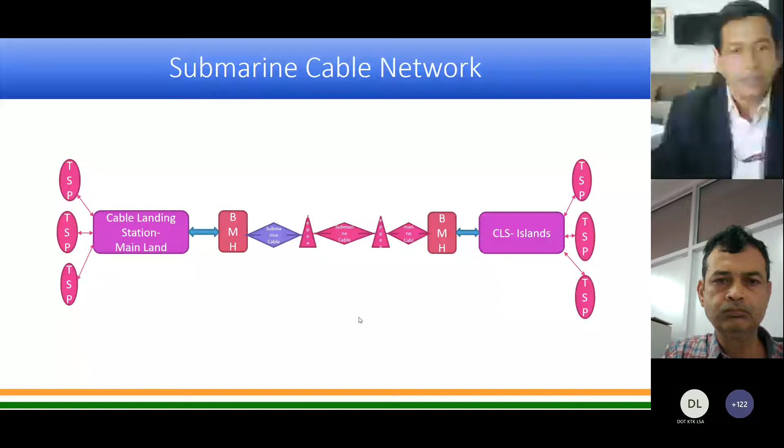As sir has told, the submarine cable is important, and satellite communication cannot be a substitute for the submarine cable. Even the LEO constellation, which they claim can provide 100 Mbps of connectivity to the terminals, cannot substitute the submarine cable. There are two major hubs in our country where most of the international submarine cables terminate. First is Mumbai and second is Chennai. Most of the international submarine cables land there. And our Chennai Andaman cable is also mentioned, second from Chennai. At present, 99% of the international traffic flows through this submarine cable network.

The total capacity available in our country at present of submarine cable is 103 TBPS. Out of that, only 67 TBPS has been used as on 31st December 2021, and more capacity is planned and under installation. Around 1000 TB of capacity is already under plan for installation.

Some of the important cables being laid include the India Asia Express and India Europe Express, being laid by Jio, and then MIST, being laid by NTT Docomo. There are also three other cables, 2Africa, Raman, and SMW6, which are coming up in future. So that was a background on submarine cable.

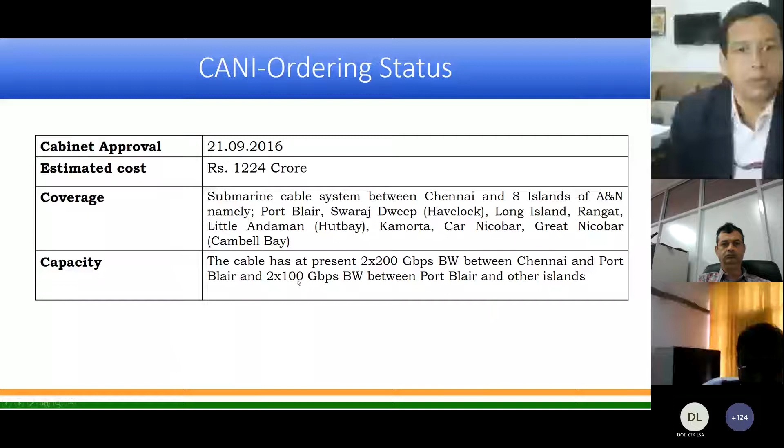As our member services sir has already mentioned, this project's foundation laying stone ceremony was inaugurated by the Honorable Prime Minister on 30th December 2018, and this project was commissioned in August 2020, well within the time basically.

Once the project got commissioned, it really helped the people of Andaman Nicobar during the lockdown period. Some children who had returned back to their parents continued their studies because of the availability of this cable, and e-medicine services and e-banking services really helped them cope during the COVID period.

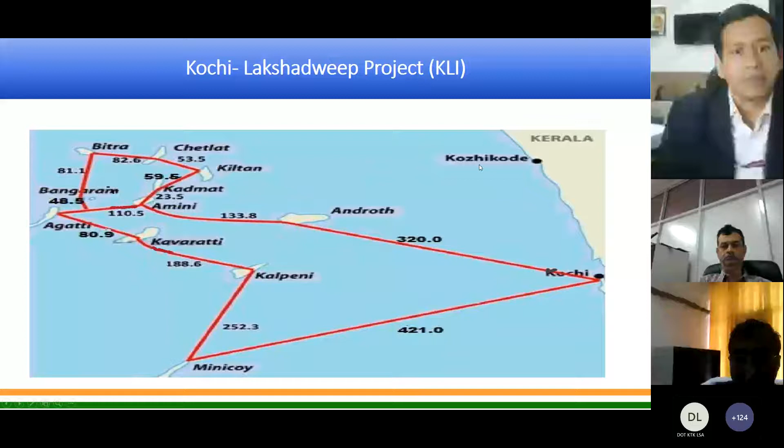The purchase order for this project was placed in September 2021, and the implementation period is of 2 years. But we are targeting that this project gets completed by May 2023. The Honorable Prime Minister from Red Fort has given the target of 1,000 days, so this is ending in May 2023.

After May, the rainy season starts, so we need to anyhow finish this project before that. Otherwise, again there will be no work period up to November. So we are targeting to get it completed by then.

Now, after discussing the CANI project and KLI project, I would like to come to the point of how things look in USOF when we take up a submarine cable project. There are three important parts of handling submarine cable projects in USOF. First is the approval stage, second is the implementation stage, and third is the O&M stage.

When any submarine cable project is taken up in USOF, the first step is to prepare the DPR, detailed project report, based on a desktop study. That DPR report is further discussed with all the stakeholders. Stakeholders include the CS wing, finance wing, BSNL, and then we discuss it with the UT administration, because they are the biggest stakeholder in this, and we have to get their consent.

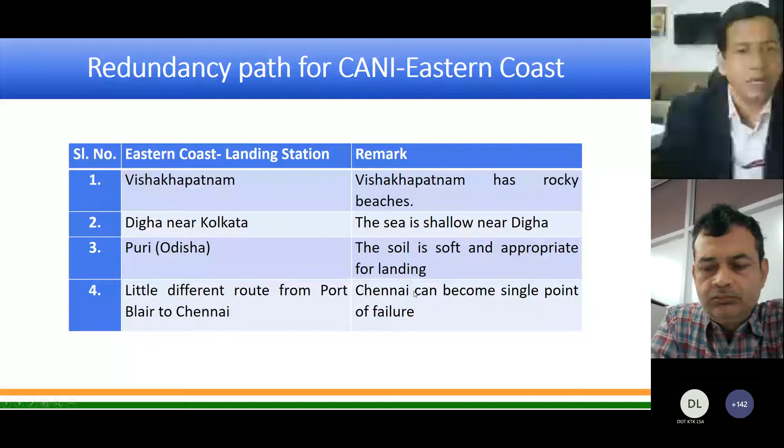So this is how the entire structure of the cable will look like after laying the redundancy cable. In this project we are not only laying the cable from Puri. At present, as I mentioned earlier, 8 islands have been connected, but while laying this redundancy cable we will be connecting 8 more islands of Andaman Nicobar, which have been requested by the UT administration. One more important thing we will be doing is putting all the islands into ring connectivity also.

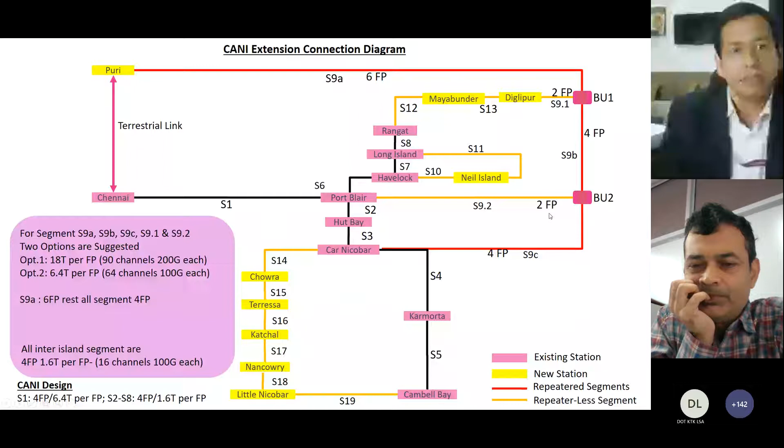So the new islands as well as the old islands will come into the ring, so that in case of any failure no services are hampered. This is how the cable will look: it will go from Puri, along the northern side of Andaman Nicobar, and then come downward.

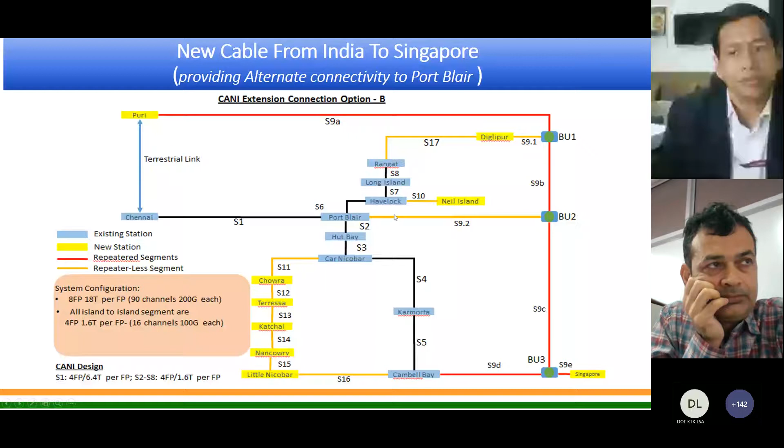There was one thought of extending connectivity from Port Blair to Singapore. A DPR was prepared for that project, but it could not be taken up. Earlier it was thought that by connecting Port Blair to Singapore, international bandwidth would be made available, and BharatNet services in India would become cheaper because internet bandwidth would come directly from Singapore to our country.

But the issue was further analyzed here in our DoT. We found that BSNL at present spends around 73 crore rupees on hiring international bandwidth, out of which only 2.34 crore rupees is spent on hiring bandwidth from Singapore. The rest is hired from multiple places on the western side, and at present most of the bandwidth comes through an MPLS kind of structure. So this project was discussed but has not happened as of now.

Plus, setting up of any international cable requires formation of a consortium and basically identification of demand. Plus, we need to set up offices there in Singapore, or we need to have a plan for who will buy our bandwidth. All those things are needed for establishing the submarine cable. So that's why this project could not be taken up.

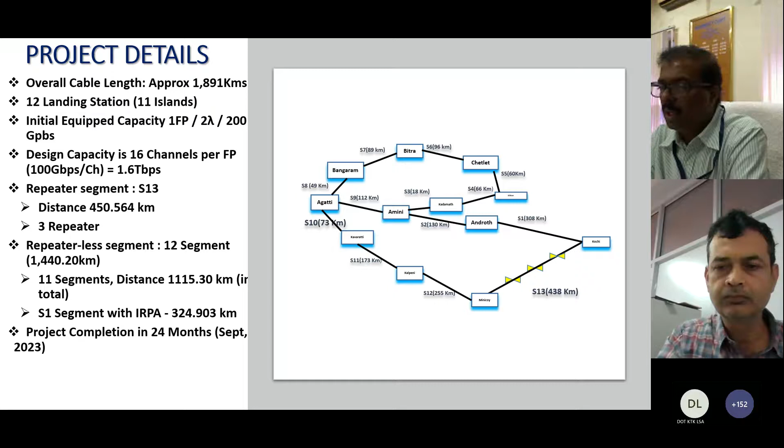And there is one repeatered segment, from Minicoy to Kochi, which is about 450 kilometers. There will be 3 repeaters under the sea, and all the other 12 segments are without any repeater. Whereas S1 has a span length of about 330 kilometers, which requires an amplifier. The amplifier is called an inline remote pumping amplifier; basically, it is a Raman amplifier. We will see the details of this amplifier later on, and the project completion is 24 months. Next slide, please.

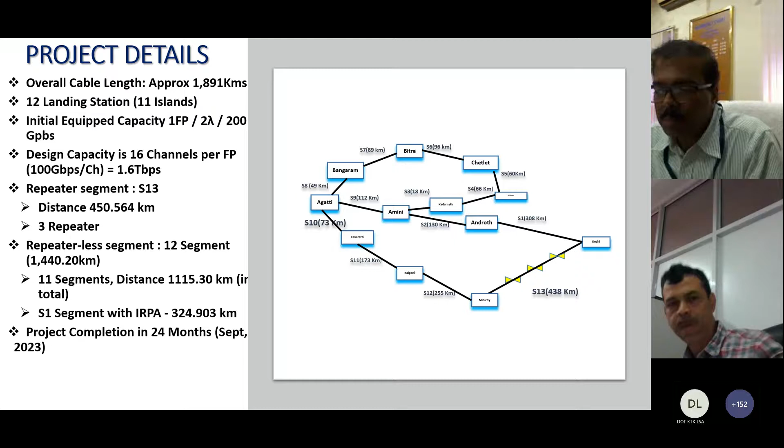So these are the segment lengths, total 1,891 kilometers. Next slide, please. Sir, next slide. Yeah. So coming to the wet plant part, next.

So most of these are covered, but how the route is selected: there are certain criteria, various factors which are taken into account while deciding the route and the length. Normally, the seabed profile will be studied thoroughly. We would like to lay the cable in deeper sea than shallow water, because in shallow water the cable is prone to damage. So we will select the deeper sea for laying the cable, and also in the deeper sea we don't require much protection like double armored, etc. So that is the preferred route, and accordingly the route is decided.

Then, especially, Lakshadweep is ecologically very fragile. As you know, Lakshadweep Island is a coral island, so the coral should be protected. That also is taken into account while deciding the route. Then proper crossing over: we have to take the existing cables and other pipelines into consideration while deciding the route. Then we should avoid certain zones earmarked by defense and environmental protection teams. So that also has been taken into consideration.

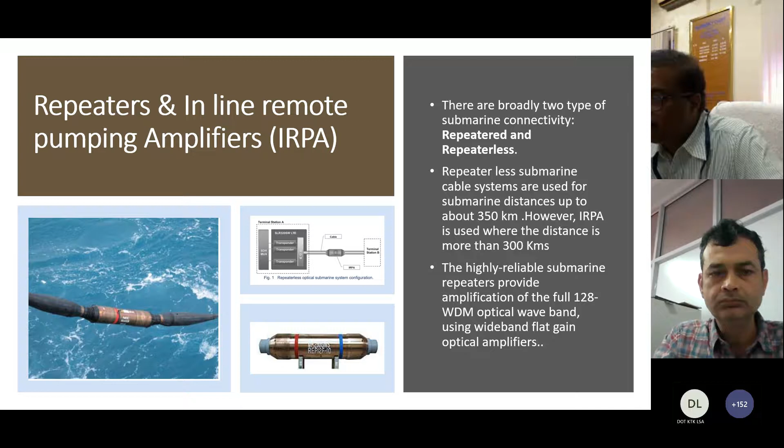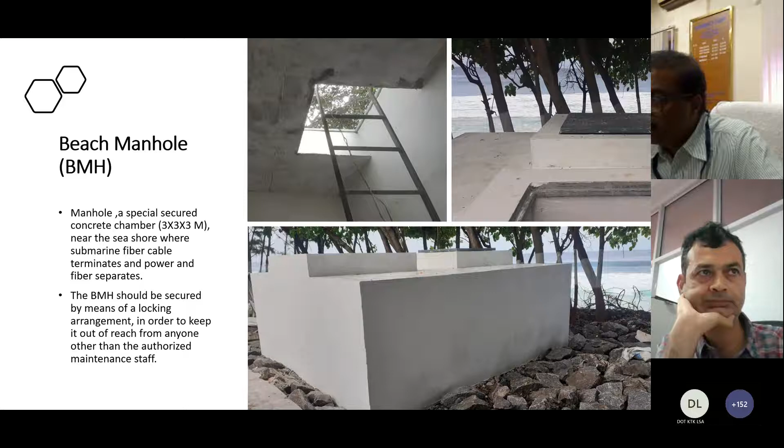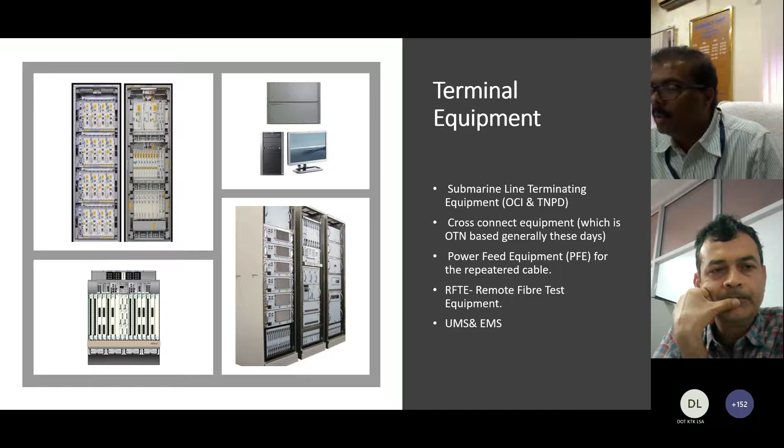In the CLS, these are the terminal equipments available. At the left side top is the OCI, the open cable interface, and then the transponder. Below it is the cross connect; basically, the cross connect works on the principle of OTN. Then we are using the power feeding equipment, required only for the repeater section, shown in the right bottom, and then the remote fiber test equipment, which is basically for monitoring the cable, fiber, repeaters, etc. Next slide. Next slide.

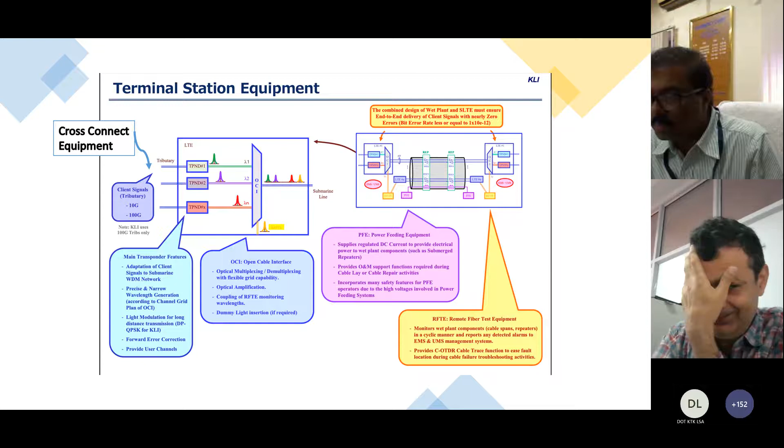This is a brief about the equipment in the cross connect. We can take all the available services, whether SDH based or Ethernet based, whatever it is, it can be accommodated. Then in the cross connect, based on the OTN protocol, the path selection will happen. Then it will go to the transponder. The transponder will convert the white signal to the colored signal, the required lambda for the submarine WDM, make it very narrow, and forward error correction happens there. It also provides some user channels, etc.

Then it will be fed to the OCI, where the muxing and demuxing happens. It also provides the lambda for the remote fiber monitoring system, and it does the dummy lighting, where the lambdas are free, dummy lights will be sent so that it will not disturb things once the other lambdas are loaded.

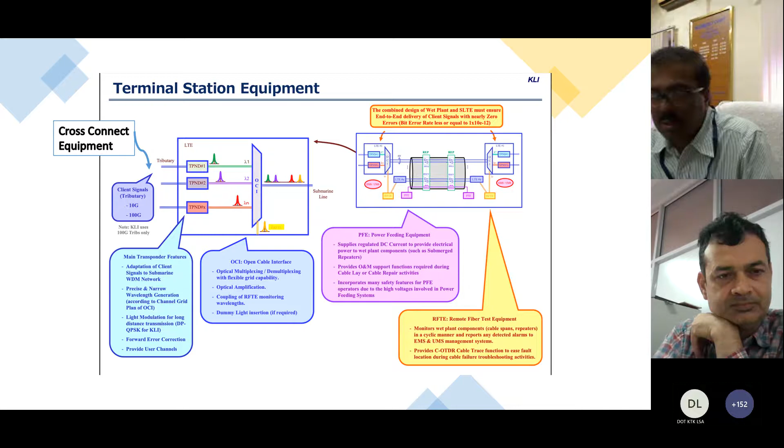Next slide, please. Apart from this, we have the UMS and the EMS. UMS and EMS, I think, are familiar to all of you, so we are not going into the details. Next slide.

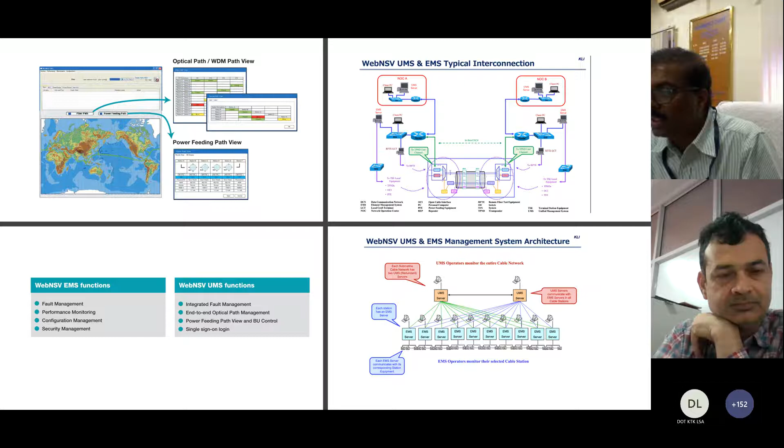Only thing is the remaining 3 processes are the most crucial part of this project, which require the infra readiness from BSNL side, which we are trying to make ready by the time NEC is ready for the cable laying and equipment installation. So the project is in a very crucial phase now. As it was told, our endeavor is also to complete it before this next monsoon. So probably by May, the project should be completed. Next slide, please.

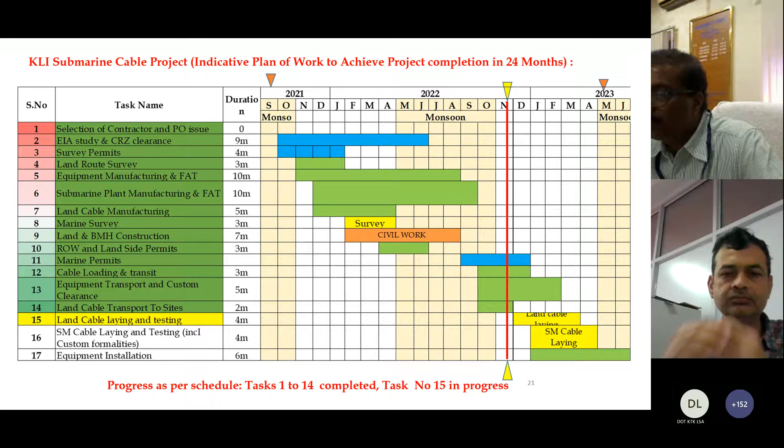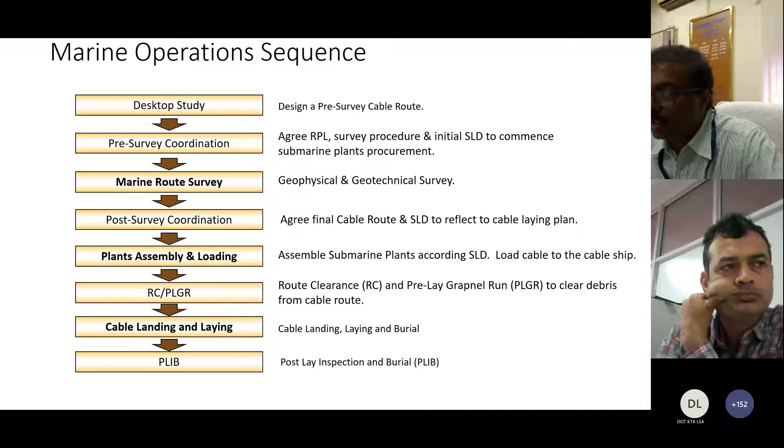So this is the next. This is the marine operation sequence. Already it was briefed in Sanjay Vashni sir's presentation, so I'm not going into the details. Next slide. So this is regarding the marine survey. Next slide. Next. So in the marine survey, basically based on the desktop study, we will prepare an approximate route of the network, and on that approximate route we will be conducting the detailed survey. Next slide.

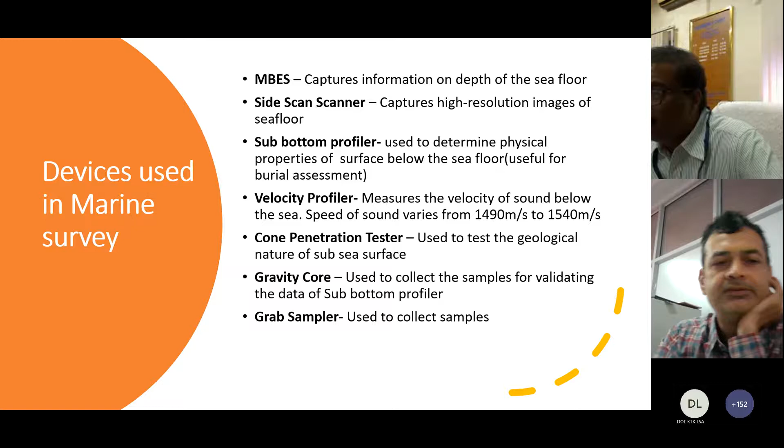These are the major tools used for the marine survey. The first one is the multi-beam echo sounder, which captures the depth of the sea floor. The second one is the side scan scanner, which will give high resolution images of the sea floor. And the sub-bottom profiler will give the seabed profile, what sort of strata is available below the sea floor. And then the velocity profiler gives the velocity of sound inside water, which is an important parameter for other equipment to process the data.

Next is the cone penetration tester. Basically, it will test the physical nature of the soil under the seabed. And in gravity core, an equipment will be dropped from top, and it will collect a sample of the soil, which is taken for further testing, and this will be used for deciding the burial activity. And the grab sampler is also for collecting samples from the seabed. Next slide.

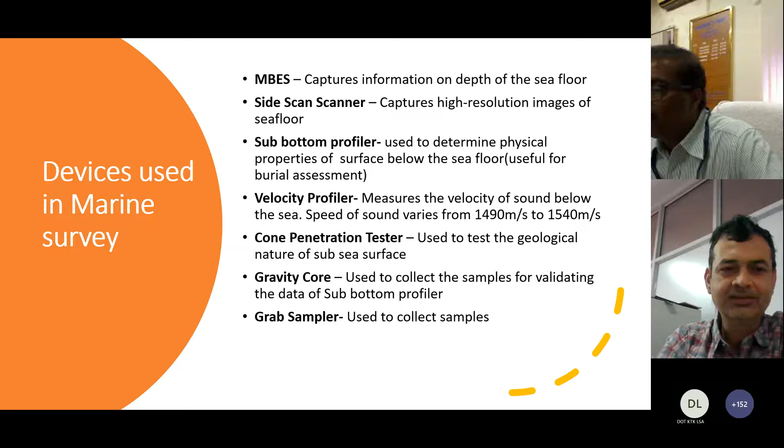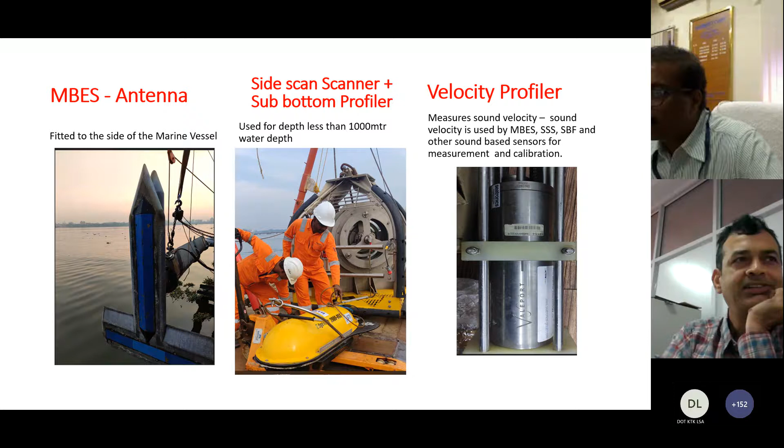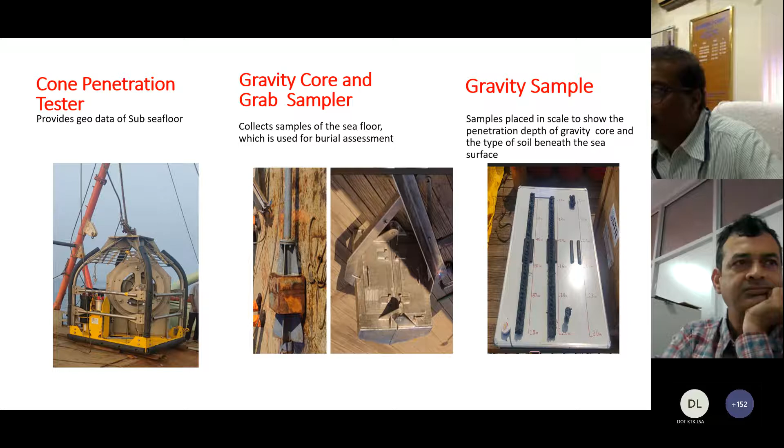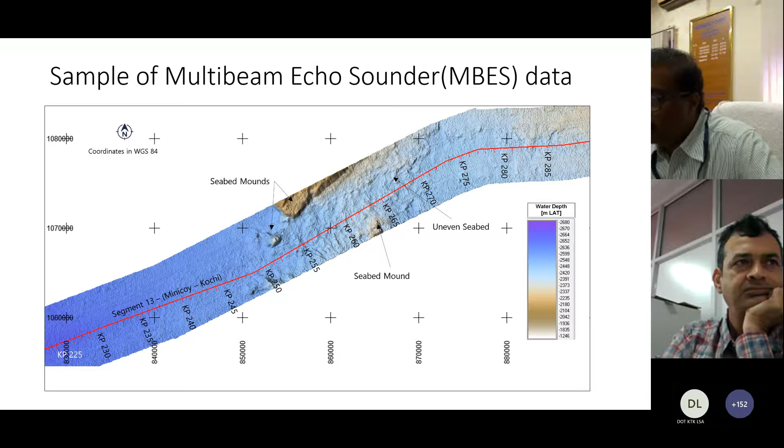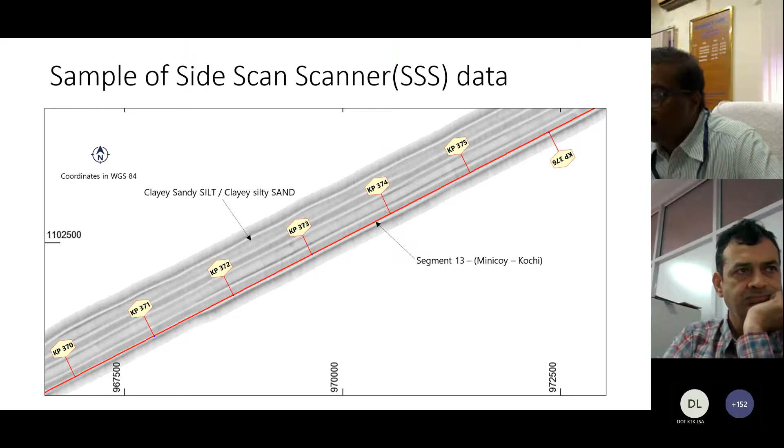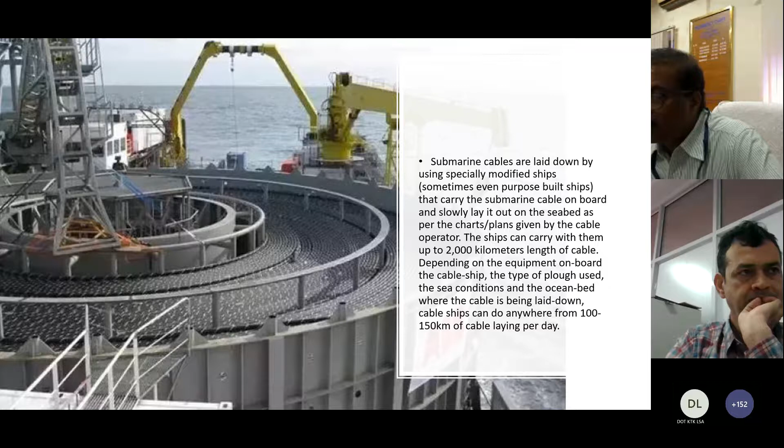So this is the ship which is going to be used for this KLI project. It is called MV Maram. And you can see another small boat nearby. That also is being used for this laying process. Next slide.

Next, please. I think these photos are not coming. Sir, can we have the previous slide? Okay, sorry, the PPTs are not coming properly.

Basically, the main vessel will not be going up to the seashore. The main vessel will be at a particular distance from the seashore. From there, the cable will be drawn by a small boat. The cable will be tied with buoys, and the cable will be floating over the water, and then it will be dragged to the beach manhole, and from the shore to the beach manhole, trenching will be done, and the cable will be laid up to the beach manhole.

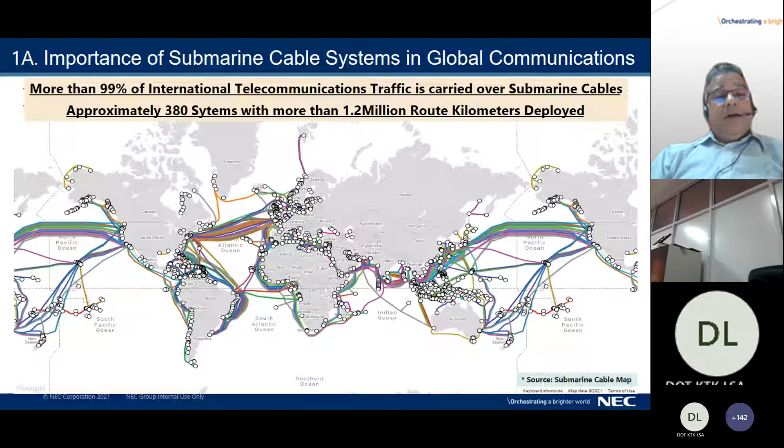If we look at the overall market, this information is around the pandemic time, and you can see there is huge growth in demand in traffic, around 140% in the Asian region, which is the region where we belong. This region generates the highest traffic currently, obviously because of the number of people living in this region, the highest population countries belonging to this region, China and India. So it's quite natural that the traffic growth or bandwidth demand is highest in this region.

Annually, around $13 billion are getting invested into submarine cable projects, with close to 13.5% annual growth that this industry is experiencing. And on account of the pandemic, work from home, and increased demand on online connectivity, it has helped the growth of this market.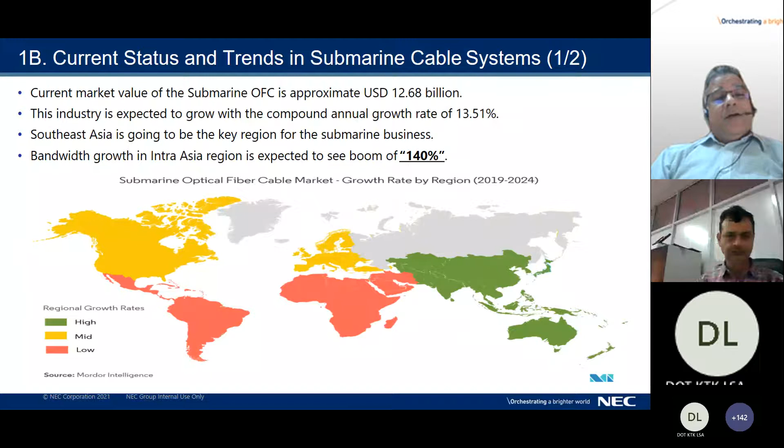Apart from the telecom operators themselves, the major submarine cable owners are the OTT players or content providers. So there are huge investments coming into submarine cables from these players, namely Facebook, Google, Microsoft, and recently even Amazon is investing into construction of submarine cables. So majority of the submarine cables that are getting deployed currently are co-owned by one of these players.

The second part that drives the submarine cable industry is the data centers. These players, along with the standalone data center operators, are setting up data centers globally that are the hub for communicating traffic from one place to another, and also for holding information and disseminating data. So content providers and data centers are the two key pillars of growth for the submarine industry.

Besides the telecom operators, traditional service providers are also there, but of late, the content providers have overtaken the telecom service providers in terms of absolute investments going into submarine cable systems.

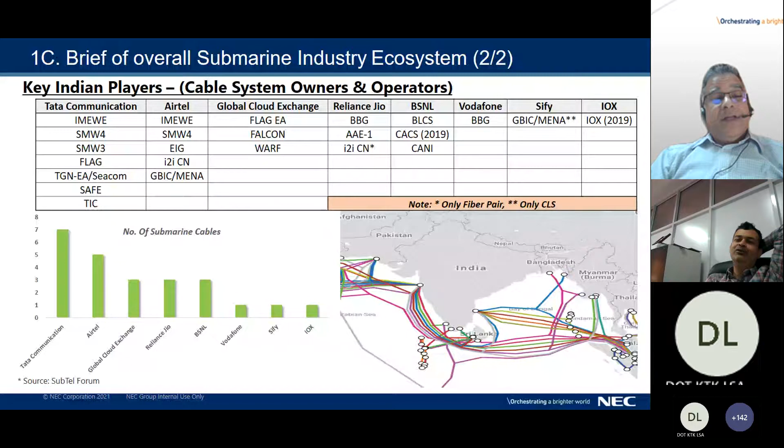Considering the amount of investment required for submarine cable systems, which runs into several hundred million dollars depending on the overall size of the network, it's not always easy for a single operator to own the system and deploy it on its own. Therefore there are several consortiums - multiple players come together to deploy the cable system. That's one need for this consortium. Second, by nature submarine cables connect several countries, and there are operators or owners in each country who own a part of the system. So it's a collaboration required among owners in several countries. You rarely have a situation where a single operator exists in several countries and owns the entire cable system. Rarely does that happen - there's no such example.

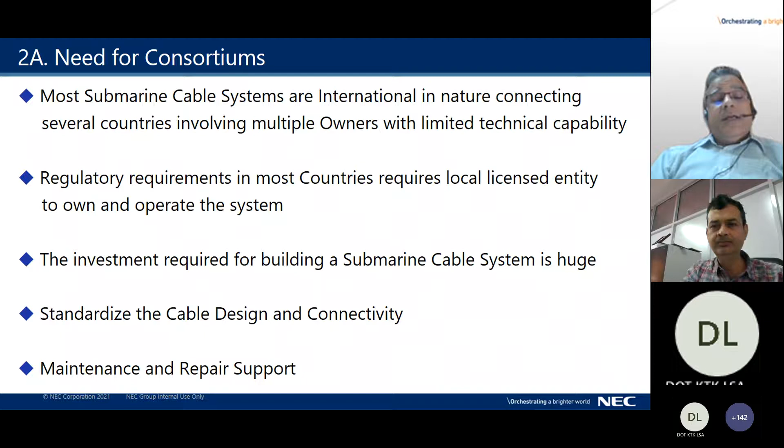In India, it's a domestic network which was introduced earlier with the CANI network and the currently under-deployment KLI network, which will be owned by USOF, implemented by BSNL. But this is a domestic network, therefore there's a single owner. However, in case of most submarine cable networks, it has a consortium with minimum 2 to 3 partners - sometimes the number of members in a consortium goes to even 20 or beyond. That's the reason - there is a standard cable design and connectivity required globally, so in order to keep that you also need these kinds of consortiums. And finally, for the maintenance and repairs of the cable globally, there are certain consortiums which offer repair services - I'll talk about that a little later.

Some of the major consortium cables are SEA-ME-WE - SEA-ME-WE 6 is the latest in this system. SEA-ME-WE 3 so far is the largest cable system deployed anywhere globally - 39,000 kilometers with 39 owners connecting 34 countries. I think 2Africa will possibly be the largest once completed - it may exceed 40,000 kilometers. Then Asia-Africa-Europe network with 20 consortium players, 25,000 kilometers. AAG, Asia America Gateway, 20,000 kilometers with 18 owners. And Asia Pacific Cable Network, 19,000 kilometers, 23 owners. The top three of these are connecting India also, but APCN is not connecting India.

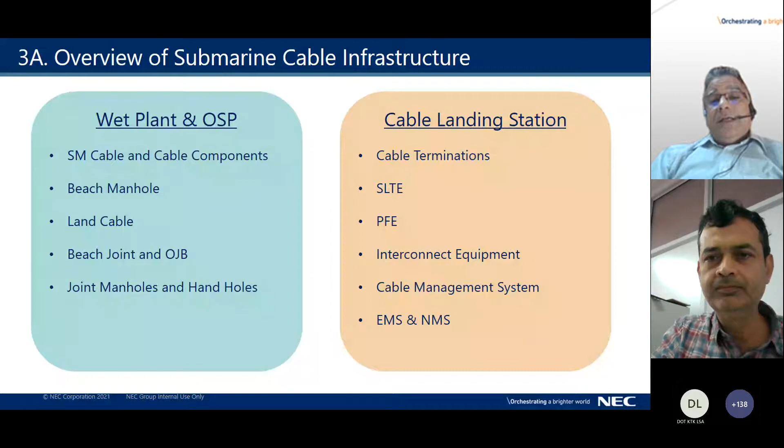So let me talk about the installation and commissioning process of a submarine cable system. This has also been spoken about in brief by the previous speakers; I'll go into a little more detail. The activities start from what is called the desktop study. Data is collected from available sources, the internet, or even currently Google Earth, and there are specific software available which help in collecting this data, based on which system engineering and design is prepared.

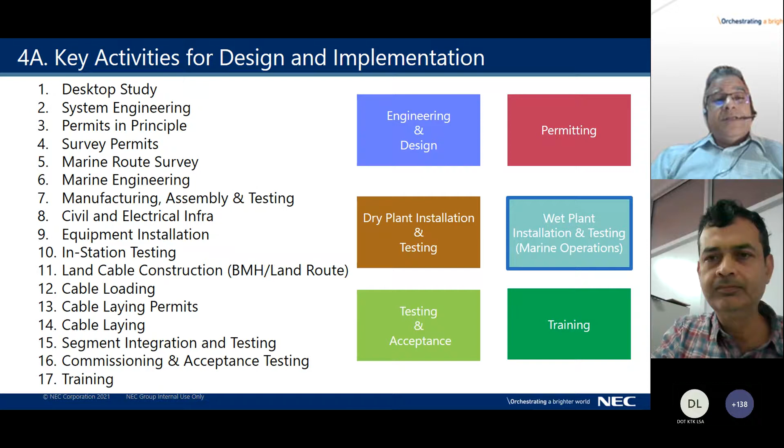Since I think you would be well aware about the installation of the transmission equipment in any terrestrial network, and submarine cable landing equipment installation is something similar, I will not talk much about that. I will go into the marine part of it, the wet plant installation, which I believe will be more interesting for you.

So these are the steps. I already spoke about desktop study. Then there is a pre-survey coordination required to decide what is the route that we should survey, because it is a narrow stretch of path along the vast ocean or the seas which has to be surveyed. You cannot, it takes a lot of time. So you have to ascertain some kind of a route position list, or RPL, as it is called, or a route in simple terms, along which the submarine cable is expected to be deployed, which is ascertained during the desktop study. And along that route, the survey is done to ascertain whether the route is appropriate.

Sometimes certain locations are found as not appropriate, then a diversion is taken, and an alternative route is selected. But that diversion has to be as minimum as possible, because it's a hugely time consuming activity. Once the data is collected, we conduct the detailed study of the information collected and decide the final route and the overall system design, based on which the manufacturing and assembly of the system happens.

And the first activity that happens before the cable is laid is the route clearance or pre-lay grapnel run. This is required for clearing any kind of debris on the seabed, such that the cable does not get damaged, or the equipment that is required for burying the cable does not get stuck in this debris and damaged. It's very expensive equipment, which can actually damage the cable itself also.

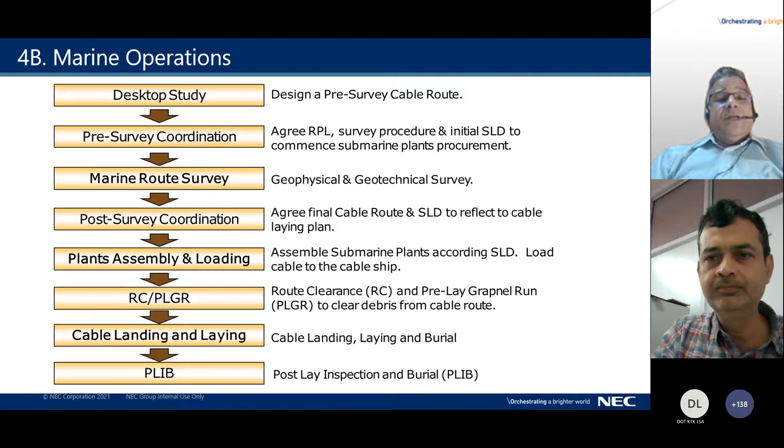Then the cable landing and cable laying is conducted, and once the cable is laid, some part of it is buried, and post burial it's also inspected whether the burial is conducted properly or not, and that's done by an ROV. And any place where the burial is not appropriate, the ROV helps in further burying the cable. So I will give you some more pictorial information and explanation about these activities.

Needless to say, all the marine activities, whether it is survey or cable laying, have to be conducted during a good weather period, because if the weather is not good, data cannot be collected appropriately, and even the cable cannot be laid properly.

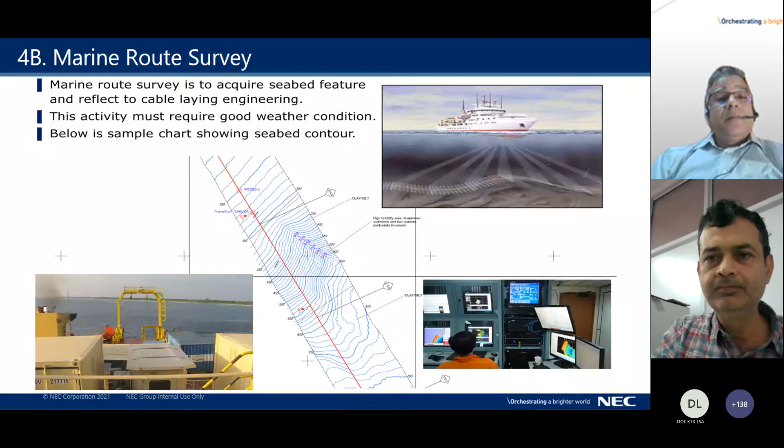These are the components that I was talking about. These are the repeaters before they are assembled into the cable. These are the repeaters ready for assembly with the submarine cable. You would see there is a lot of protection around the repeater endpoints, and it is assembled with the cable here. It's getting loaded on the vessel and connected with the submarine cable. And inside the vessel, there are huge cable tanks. The entire length of cable is stored in these cable tanks.

The repeaters have a separate one. I don't have that picture. Something like here. This is a similar kind of repeater stack in the vessel where the repeaters are stored separately, and the cable is stored in the ship in the tank. So once a repeater appears, it is stocked in a stack, and then the cable comes down once again along this runway and is coiled along the tank. This is a process which is conducted manually. You can see the people sitting inside the tank, and you can imagine how huge it is.

So to give you an idea, for the KLI currently under deployment, the overall cable to be supplied together with the spare is close to 2,000 kilometers, and it takes roughly 15 days for the cable loading process, which is carried out day and night. So you can imagine how lengthy this process is, and sometimes we ship several thousand kilometers, and cable loading can take even up to a month or more. The typical rate at which the cable is loaded is around 4 kilometers per hour.

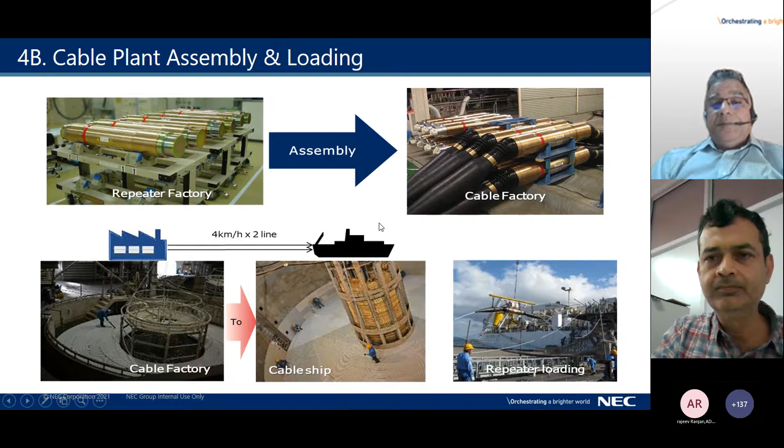I would like to explain the cable landing before the cable laying process starts. Cable landing is an activity where the vessel approaches the shore and connects the cable with the beach manhole, terminates the cable at the beach manhole. This process is of two types depending upon the depth of the sea close to the shore. If the depth of the sea close to the shore is more than 15 meters, somewhere around 2.5 kilometers away from the shore, then the main cable lay vessel can approach the location, and we can achieve what is called direct landing.

That means the vessel cable is pulled right from the vessel to the shore. It is done by a small boat and then pulled using JCB and other equipment and terminated into the beach manhole.

Now, in a situation where the depth of the sea is shallow and the distance from the beach manhole and the 15-meter water mark is more than 2.5-3 kilometers, then the main lay vessel cannot approach the landing location, and direct landing is not possible. This is because it's extremely difficult to manage the cable of such long length because of the weight of the cable and other challenges.

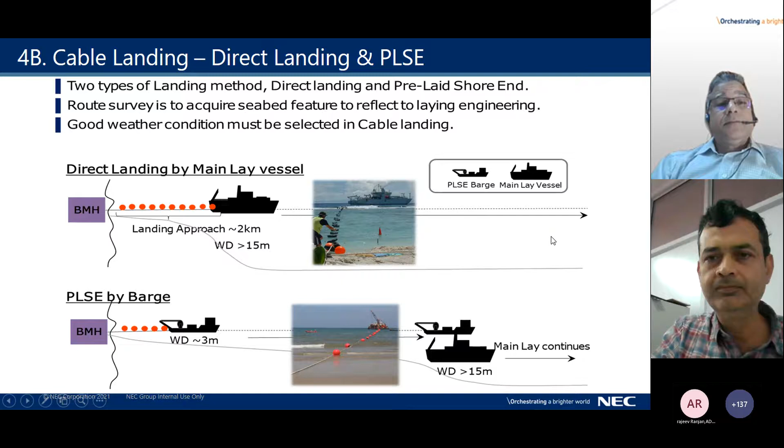So the cable jointing is done using a UJ joint, and once the cable is jointed with the main lay vessel, the main lay vessel then thereafter goes and lays the cable, and along with that, it buries the cable using a machine called plow. It's similar to a plow used by a farmer, but much bigger, much heavier, and obviously more complicated. So it is controlled from the vessel.

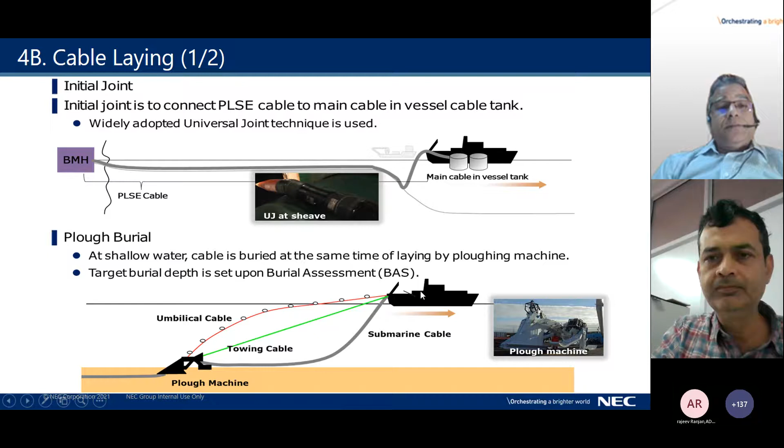And this is a picture of the plow machine, by the way. It's not very easy for you to discern. So the height of the plow is like a 1.5-story building, something like that. So it buries the cable up to certain depth, and after the depth up to which the cable burial has to be completed, the cable is surface laid. It is laid along the surface of the seabed. Typical cable laying speed varies from 5 to 7 kilometers per hour.

This is the picture for deployment of a repeater. And typically on a long route, the cable laying happens from both the directions, and there is a joint done in the sea, which is called the final joint or a final bight, before the cable is finally released into the sea to rest at the cable bed.

So typically for the jointing purpose, the length of the cable required is around 2.5 times the water depth, because both sides of the cable need to be brought onto the vessel, and there is certain additional cable required for the purpose of jointing. Same thing is required when you do the repairs.

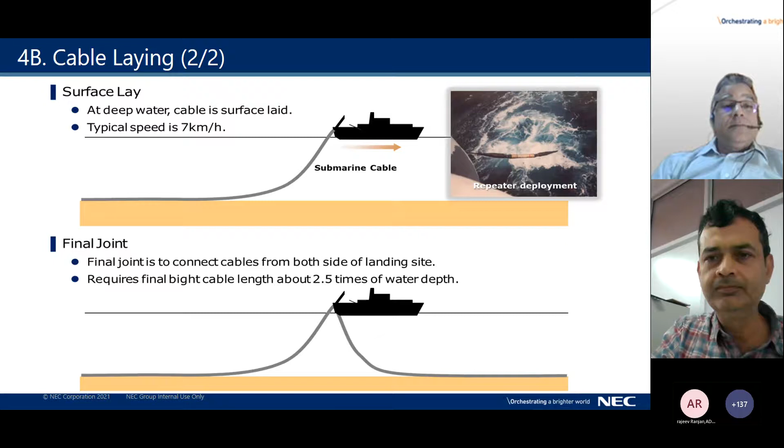So some of the challenges which every submarine cable project encounters are there is a limited weather window available. For example, there is monsoon in India. The marine activities have to be conducted during this weather period only. For the projects related to Andaman Islands and Lakshadweep Islands, we face additional challenge related to the transportation among the islands, both manpower and material. There's limited facilities available for such transportation. Sometimes it's even difficult to find accommodation. Particularly in Lakshadweep, even in Andamans and few islands, there are no hotels available. So private accommodation has to be arranged, or some government guest houses are required.

There is a lengthy permitting process that is required for every stage of the project, and it needs to be coordinated nicely so as to avoid any delays. And sometimes the cable landing station and infra is not available. It needs to be constructed parallelly and needs to be done before the equipment arrives for installation. There are sometimes protests done by fishermen. They don't allow the activity along the shore. They feel it will disturb their livelihood and stuff like that. And you have to manage those issues.

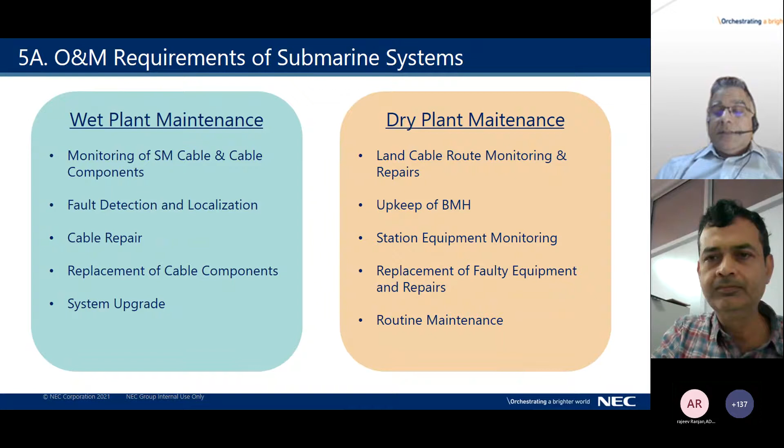So after that, this has already been repaired. They have reconstructed the beach manhole, and the cable terminated into a fresh beach manhole. But this is something that happens. It's not unusual. Apart from that, we have to be wary about fishing activity, anchorage, trawlers, and all that. And that's the reason the cable is buried in shallow waters. It is double armored, has protection, and on top of it, sometimes you also put articulated pipes to provide further protection.

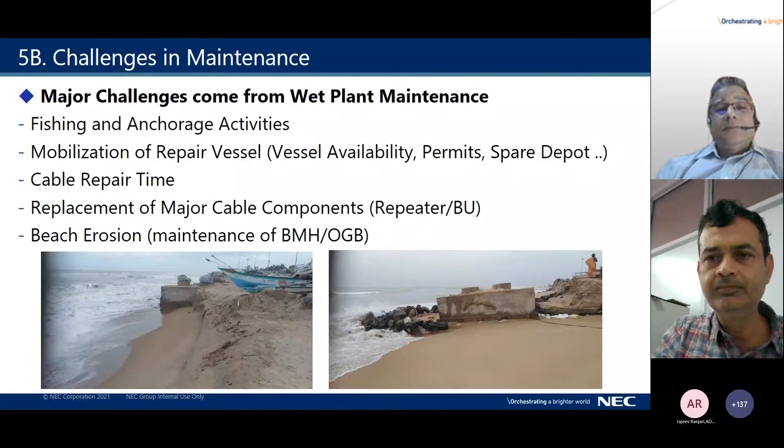Thomas, are you on mute? Somebody has raised the hand. Let me make him a presenter.

Ashok Kumar ji, please ask. Go ahead with your query. Yes, am I audible? Yeah, you are audible.

Second question would be how do we feed the power over this 300 to 400 kilometer distance? If they can tell about the power feeding arrangement. So these two are my technical questions. Thank you.

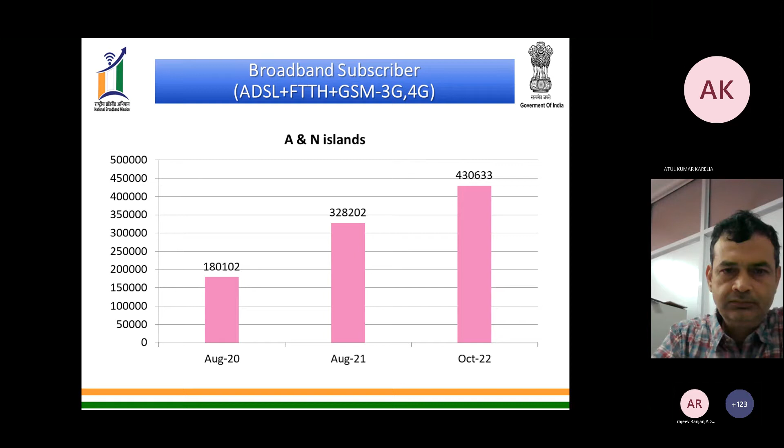There is growth in BTSs also. The overall BTS count increased from 492 to 817, approximately 66% growth. And the 4G BTS count remarkably increased from 52 to 437, around 700% growth, and it is going to reach almost 100%. Whatever BTSs are left are likely to be converted into 4G BTSs in another 1.5 to 2 years. So this is a major change which CANI connectivity has brought to the island: a remarkable increase in 4G BTSs and broadband customers.

If we see other operators' quality of performance parameters, there is a marginal increase of 2% in success rate, from 97 to 99%. There is a marginal decrease in call drop also: earlier it was 2.26% average, and now it is around 1.03%. And our success rate also marginally increased by 2 to 3% comparing pre-CANI and post-CANI.

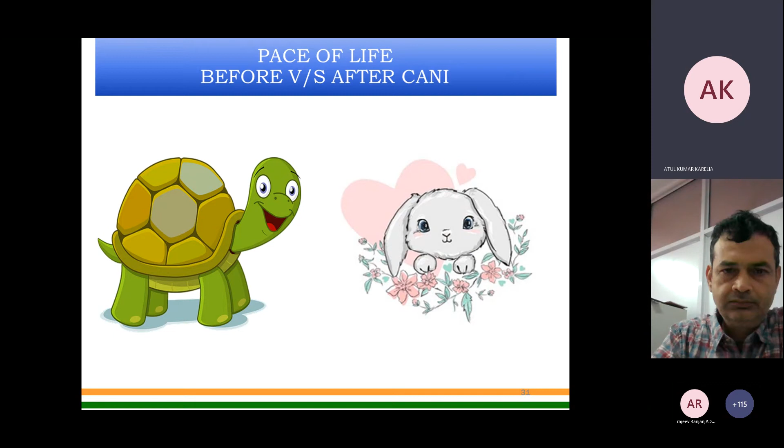So not everything is wonderfully fine. If you talk in terms of collective 360 degree view, not everything is wonderfully fine here. So post CANI, DOT and USOF have conceived certain projects which are intended to bridge the gap.

One project going on is a USOF project for covering uncovered villages and portions of national highway. This project is going on at a cost of 129 crore rupees and intended to provide coverage to 85 villages and the rest of the uncovered part of the NH. It is conceived to have around 124 towers added in the island.

Another project going on is the BharatNet project, which is of 37 crore rupees, and it is intended to provide connectivity to 70 gram panchayats, all the block headquarters, and also all the tribal councils.

4G saturation project has also been recently added into our bucket. That's around 140 crore rupees investment from USOF, and that will be for upgrading all the remaining 2G and 3G BTSs to 4G BTS, covering all remaining uncovered villages in Andaman UT which are not covered by the first project - that 129 crore project which is executed by Reliance. This 4G saturation project is executed by BSNL.